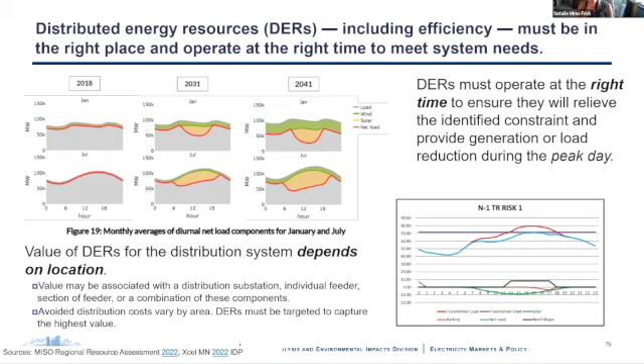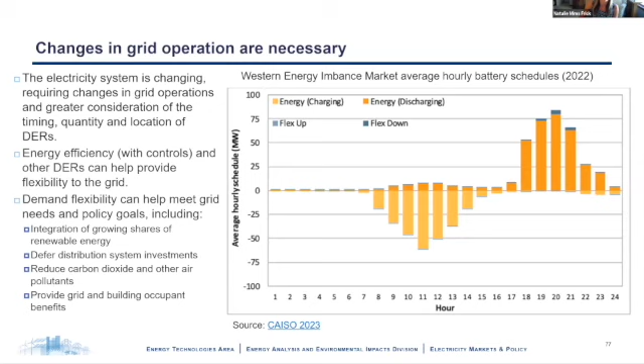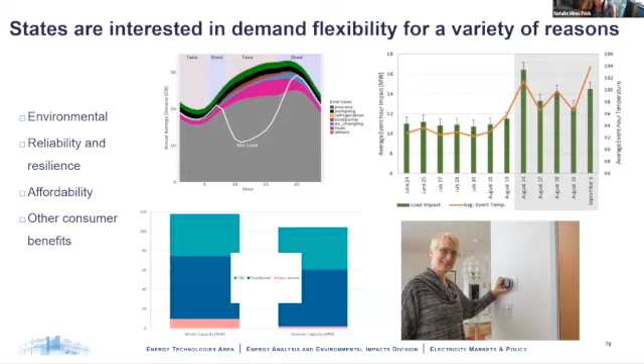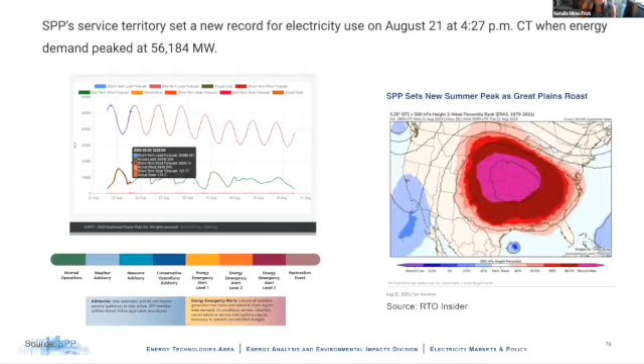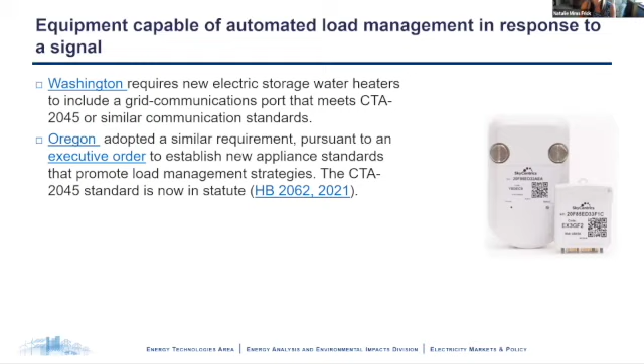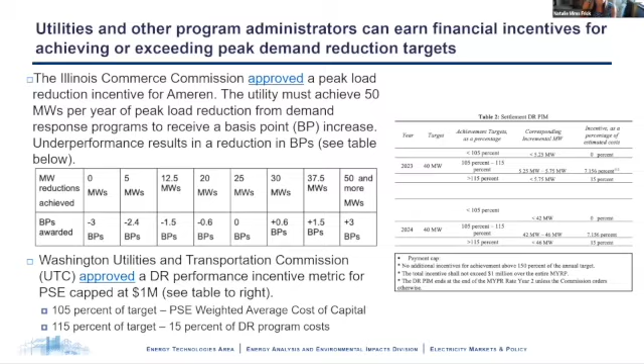And then Hawaii was in the process of updating their energy efficiency portfolio standard, and they spent quite a bit of time thinking about how to incorporate demand flexibility and demand response into the target moving forward. We can go on to the next slide.

So from a planning perspective, one option is that IRPs can consider demand flexibility measures and the time-sensitive value of efficiency. For a long time, Oregon has required modeling efficiency and demand response on par with other resources. More recently in South Carolina, the legislation required the utilities to include efficiency and demand response in IRPs, and to provide opportunities for customers to reduce or manage their electricity consumption to reduce peak demand and other drivers of utility cost.

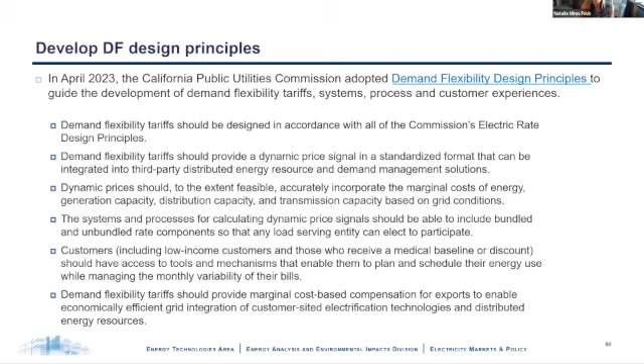And so the utilities in their plans have to provide analysis of whether the forecasted distribution of benefits and reductions of burdens accrued or are reasonably expected to accrue to highly impacted communities, vulnerable populations, and all other customers. And they also have to describe how the utility intends to reduce risks to highly impacted communities and vulnerable populations associated with the transition to clean energy.

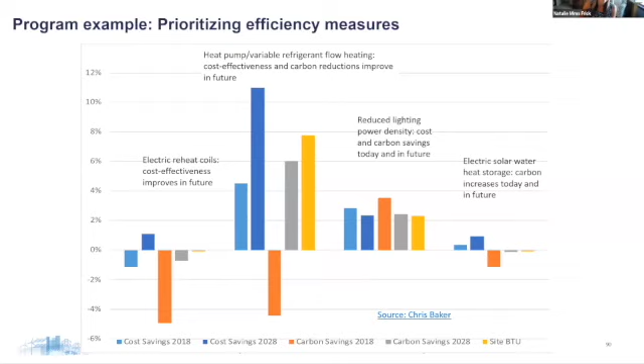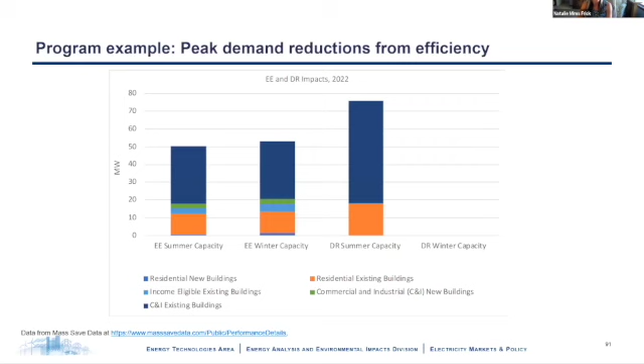And so what we have shown, the big blue bar on the top is from C&I existing buildings. That's producing the largest amount of capacity reductions. There's no winter capacity reductions occurring, but there is efficiency and demand response savings that are reducing capacity in the summer. So this is how they're thinking about their portfolio and how to prioritize resources for their efficiency portfolio and their spending on that. We can go on to the next slide.

And then they also tried out, it's not shown on this slide, doing the peak time rebate during winter morning hours, which is another time that the Pacific Northwest systems are peaking. And they got good results with that, with demand reductions comparable to those they were seeing from summer afternoon events. And so it's a resource that's available throughout the seasons and at different points in the day as well.

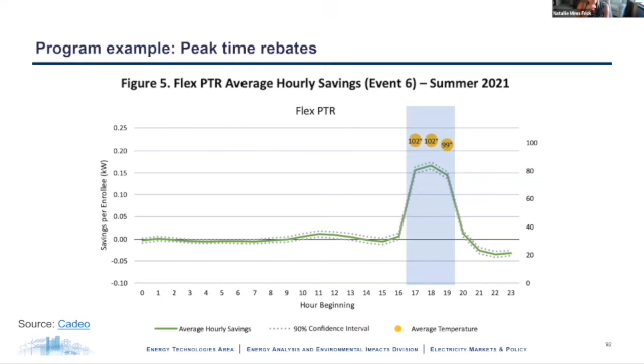And then we can go on. I think this is my last slide.

APS ended up selecting a bidder that provided products across all of those services, but it ultimately didn't end up being a successful pilot, and they're going to redo their RFP and try this out again. But this is an example of a way to try and bring in other players besides utilities to promote demand flexibility.

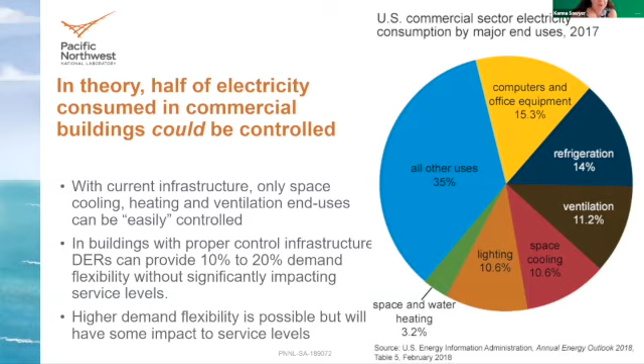So I wanted to start off by talking in particular about small and medium commercial buildings. These buildings are defined as being below 50,000 square feet, and they generally do not have building automation systems. About 80% of commercial buildings fall into this small and medium commercial buildings category. Typically, these are served by RTUs or rooftop units for their heating, cooling, and ventilation loads.

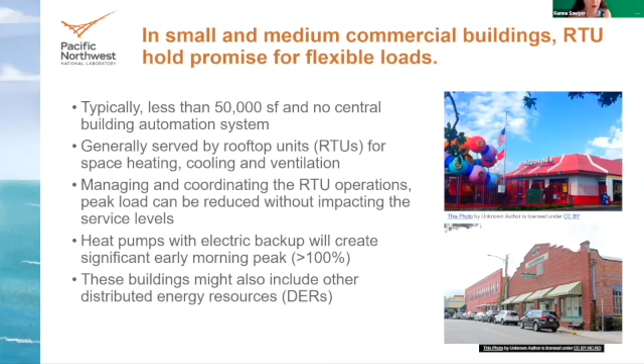And managing, coordinating those RTU operations allow us to reduce the peak load without, again, impacting service level. And it's worth noting that serving these buildings with heat pumps with backup electric power that are not coordinated, that are just operating independently, has a significant risk of early morning peaks. But there are also plenty of opportunities in these buildings to bring on some of those newer DERs like connected lighting and electric vehicles that I referenced earlier.

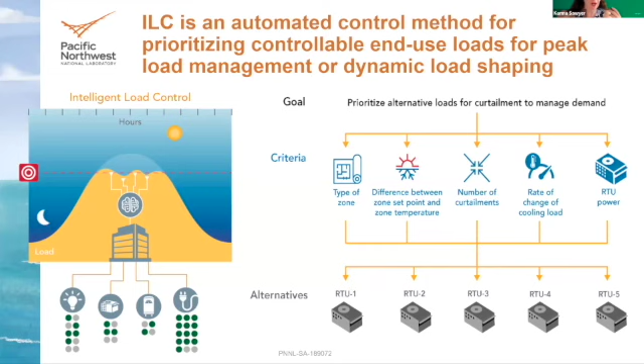So it uses both quantitative criteria, things like, what is the deviation from the set point, as well as qualitative criteria, like what's the type of zone and what room are we talking about here? Is it the corner office or is it a closet? And so that helps have kind of a few more knobs that you can turn in making decisions around these controls. Next slide, please. So we've done research in ILC in real buildings in a variety of different seasons.

I'm going to show you just a couple of snapshots of what that research looks like. But the first thing I wanted to point out is that in a large fraction of commercial buildings, both energy and demand charges are paid, obviously, on a regular basis, but the demand charge can be 20 to 50% of that total utility cost. But in most cases, it only occurs for a very small fraction of the month. We have done research to show that between 10 and 20% of this demand can be avoided without, again, impacting service levels using ILC.

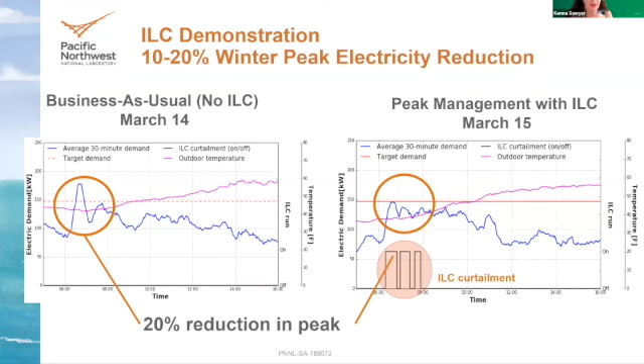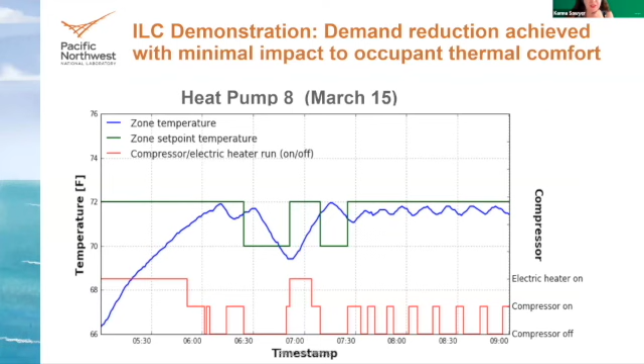You see the same thing if you go to the next slide for a summer example. I won't go through this in quite the same detail because the lines mean all the same thing. But in this case, we have a 15% peak reduction in July between the time we're not managing it on the left and we're using ILC on the right. And it is in the afternoon because it's the summer rather than the morning winter peak.

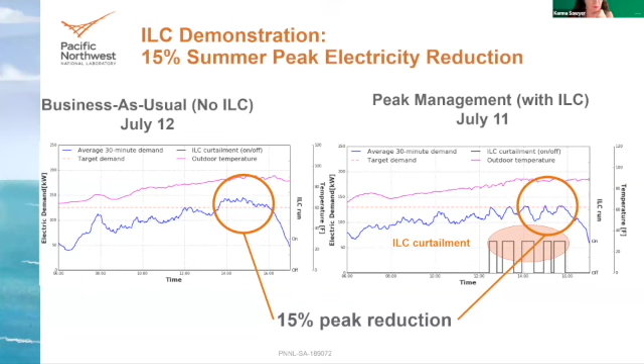And if you go to the next slide, you'll see a very similar story for, in this case, heat pump 4, when the normal cooling set point is set to 70. And when ILC wants to control the unit, it increases that set point to 72 and turns the heat pump back on whenever the temperature exceeds the set point.

So there are ways to go. We did this for 2 degrees. It's fairly conservative. You could easily go beyond that, and you would just have to manage your desire for peak load management relative to the comfort level in the buildings.

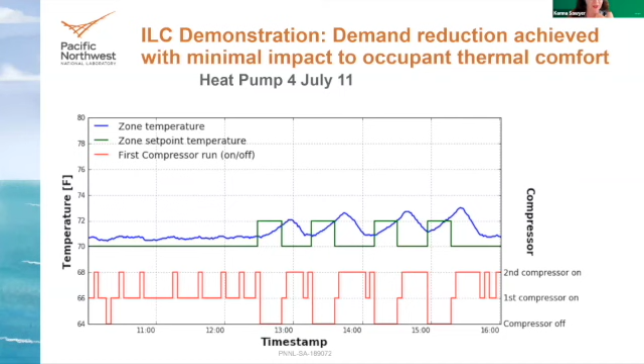So if you go on to the next slide, you'll see I'm going to pivot a bit now, going from the research that I just showed you in individual but real buildings to thinking about how to scale these in a better way. And this is the concept of connected communities that the Department of Energy has put quite a bit of funding out for in the last few years.

But LBL and DOE are collating all the results from these projects and sharing it broadly so that the information can help utilities make decisions around which different types of technologies and models might be useful in their particular circumstances. Most of these projects are still pretty early on, but I would encourage you to go to the Connected Communities website and explore a bit and get all the updates so you can see what's happening.

If you go to the next slide, I'm going to quickly walk through two projects that are out on the West Coast to give you a sense of what we're talking about here. This is the first project in Spokane, Washington, that is targeting a virtual power plant created from building loads that are connected to feeder segments at the 3rd and Hatch substation in Spokane.

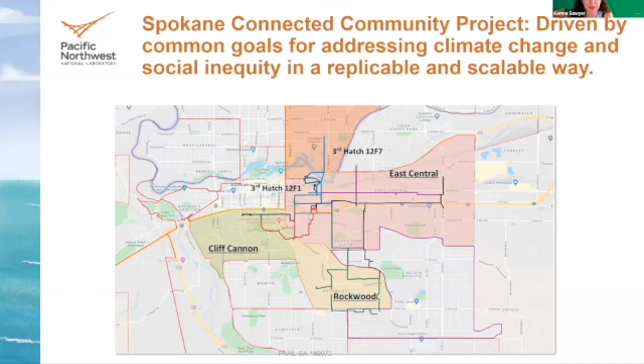If you go to the next slide, I'm going to try to not make this too much of an eye chart since I can't quite point you with my arrow here. I'll do the best to describe where I want you to look. So you see at the top, that little blue square, that's the substation. And you see at the very bottom, there's this green square. Those are solution packages that are aligned with different building types. So you see there's a home and there are different types of commercial buildings.

And there are these little colored dots at the bottom. Those line up with different packages of solutions. So the blue is an HVAC optimization package. So it's a combination of an efficient heat pump and a building automation system, for example. The black circles are energy efficiency upgrades. So that might be lighting upgrades and efficient HVAC. And then the purple circles are DERs, particularly ones that provide grid services. So you might think about EV charging stations and thermal energy storage, things along those lines.

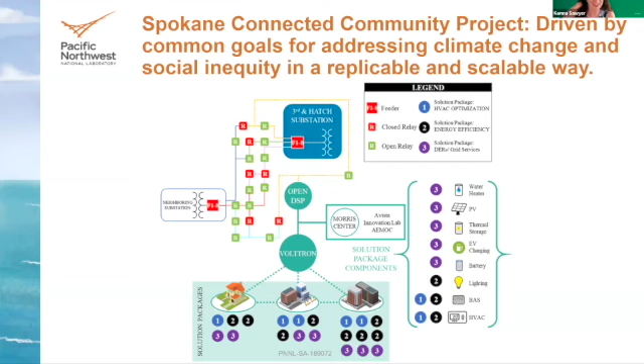This one is in Salt Lake City. It includes a suburban apartment complex, mixed-use retail, office buildings, microgrids, mass transit center. You get the idea, a ton of different building sites. But in this project, unlike what we're doing in Spokane, we're looking at buildings that are across the entire city. So it's not just tied to a single substation and could result in demand flexibility of up to 8 megawatts. There also is a goal to get 30 to 50% in energy consumption reduction through high performance building design. So this is more in the new construction space. If you go on to the next slide.

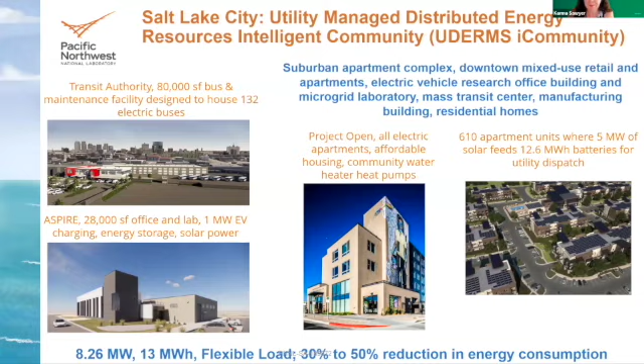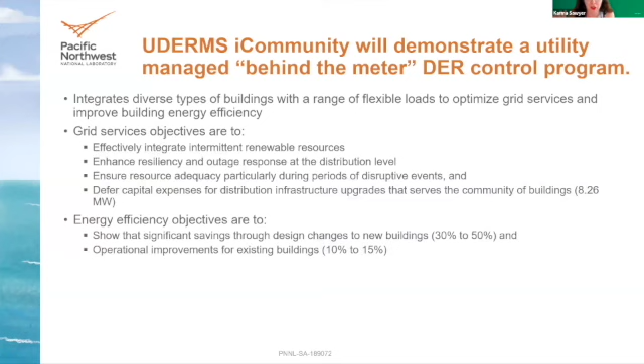So this project, which is called the UDERMS iCommunity, is again demonstrating that utility managed behind the meter DER program. And the specific objectives here are looking at integrating intermittent renewables, enhancing resilience and outage responses for the utility, ensuring resource adequacy, especially during disruptive events, and deferring some capital expenditures. And now I believe the next slide is my very last slide here, and then we can open it up for Q&A.

If I want to leave you with a couple of important notes here, it really is that flexible loads are a very powerful tool and are incredibly broad in the way that they can be utilized to mitigate negative consequences from a high penetration of renewable generation while still having the same, if not greater, decarbonization opportunities. But the unfortunate reality today is that most buildings do not have the proper control infrastructure to actually make that happen. And some significant investment is needed in that space. We're looking for scalable market-based solutions that can be deployed, particularly in commercial buildings, that can provide cost savings both to building owners and operators as well as to utilities.

And really keep an eye out for the Connected Communities project. I strongly recommend that you look it up. If you guys can send the information out to the participants about this program, I think there's going to be a lot of really useful information coming out in the next year or two that can help provide a playbook for cost-effective and scalable grid services from the building sector, and valuable data for commissions and utilities to be able to design programs that really will meet their particular needs.

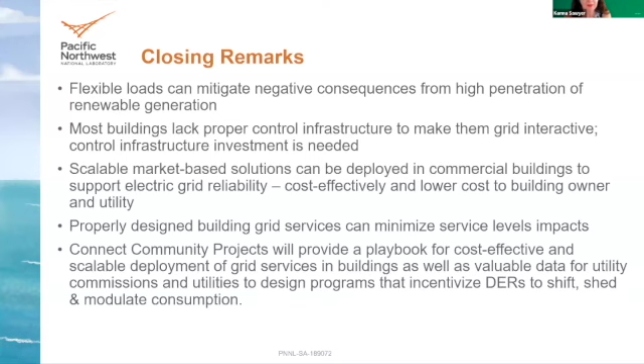All right, do we have any questions for Natalie and Karma? Yes, give us a second. We'll get you the microphone. Actually, if you want to go ahead and ask, I can try and repeat it until we get the mic on the floor. Okay, then maybe he needs a mic. Let's.

I'll just limit myself to one question. You said over 85% of buildings lack proper control infrastructure. I was wondering, as you talk about DERs, and if we think about that as rooftop solar, which can be on homes and businesses, and then even as you add batteries and electric vehicles, we're seeing the predictability of load change a lot, not just at the transmission level, but at the distribution level.

How prepared are utilities to start implementing some of these programs? Do they have the needed infrastructure to start managing loads at the distribution level as opposed to the transmission level? And if not, how much work and money is needed to bring our utilities up to speed?